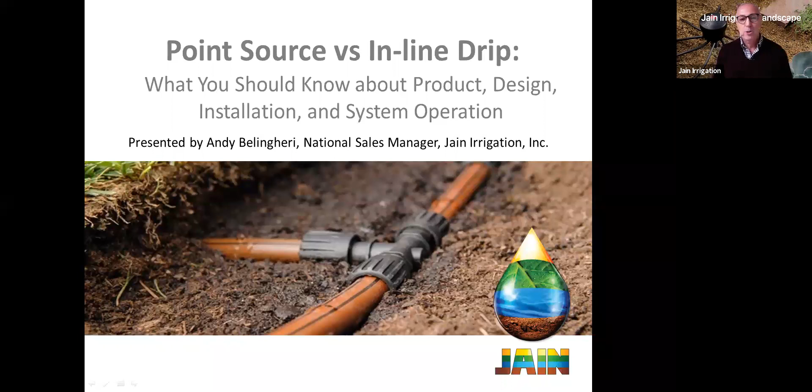A lot of this really, the impetus or the reason we started this was due to COVID-19, and we heard from a lot of customers and end users that we love you guys, but because of the shelter in place, we'd rather not see you for a while. And we wanted to respect that. And we started thinking about ways we can still keep water conservation moving forward, still connect with people, especially because everybody's been sheltered in place for a while now. We started to think these training programs might be good and helpful.

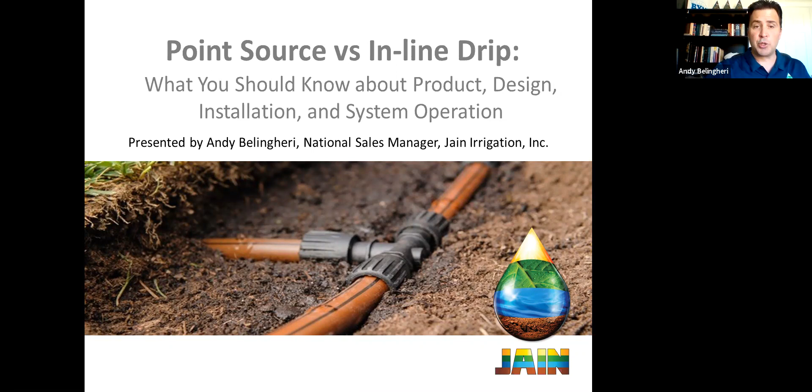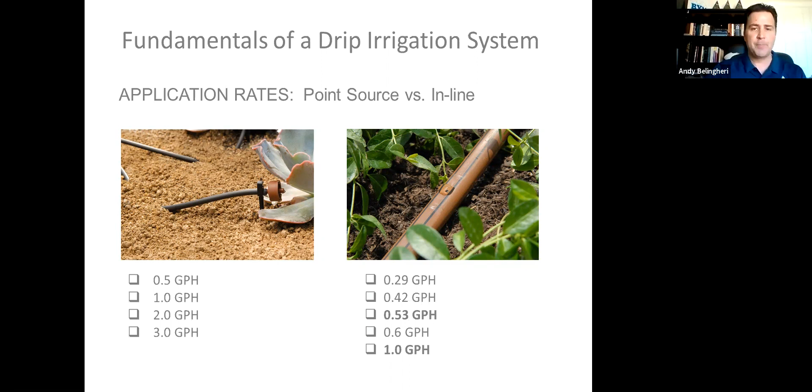In our inline or Emitterline style of irrigation, we see a wider variety of flows, from 0.29 gallons per hour up to 1 gallon per hour. From my experience, not just here in Las Vegas but throughout the Western United States, 0.53 gallons per hour and 1 gallon per hour are the most common. Now, point source and inline irrigation do share some commonalities, and I want to touch on a couple that are non-negotiable, absolutely imperative in our irrigation systems. The first is pressure compensation and pressure regulation. Pressure compensation is nothing more than making sure the flow stays the same regardless of pressure differential.

Pressure regulation, of course, is just what it said. It regulates the pressure, keeps pressure in the operating norm for a drip system to use. Regardless of point source or inline, we want to make sure we are always using pressure compensating emitters and always using a pressure regulating device. So that's one thing that both of these systems will have in common. Every drip system, we want to make sure we employ those two things.

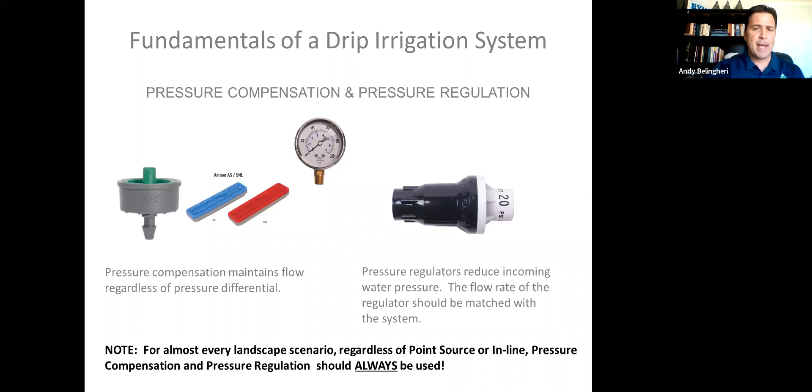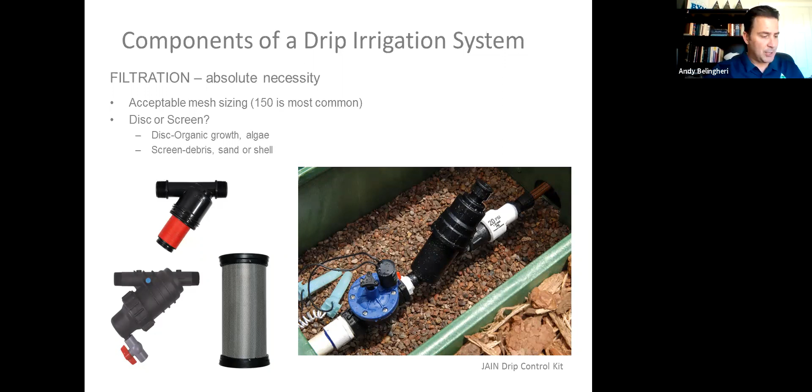One other commonality between the two systems is the necessity to flush, and I'll just touch on this briefly. Whether you're flushing your system manually by either undoing your cap at the end of the line or undoing the figure 8, or if you're employing an automatic flush valve that flushes the system automatically, we want to make sure we are flushing the lines.

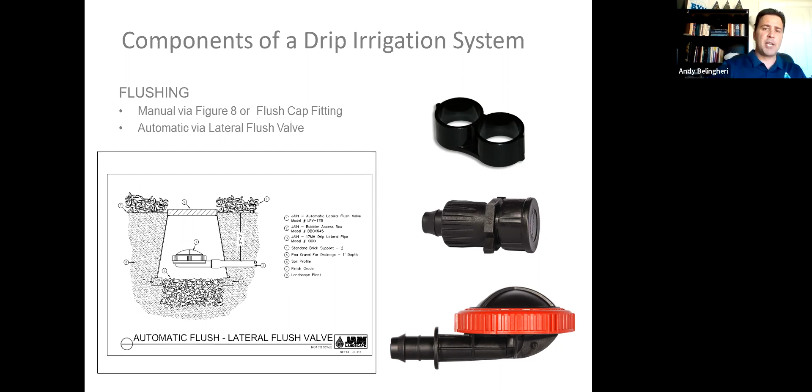What will happen is sometimes, especially in hard water environments, the mineral deposits can build up on the inside and potentially plug the emitters. Or if there was a break in the line and debris got inside there, we can use these devices to keep the system clean. And that just becomes good system maintenance there. So those are three of the commonalities I wanted to touch on between the two systems. Now, let's get into some of the specifics, differences between the two.

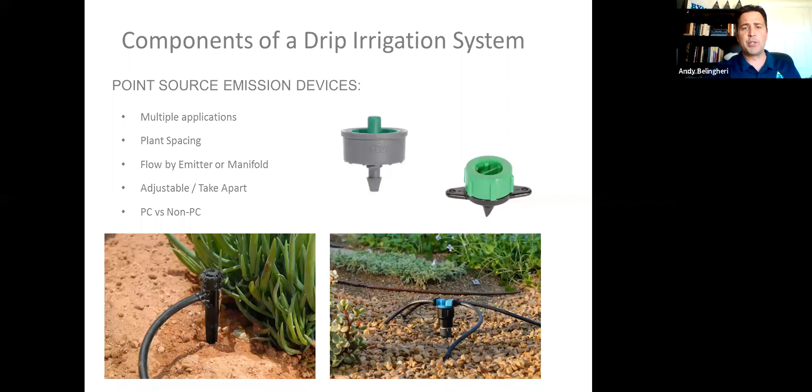The picture in the lower left-hand corner is an adjustable emitter. Again, considered point source and something you'll occasionally see out there. For a commercial landscape, I would not recommend something like that for the sole point that it is not a pressure compensating emitter. And in my experience, those adjustable emitters have a tendency of loosening up. The cap falls off, and the next thing you know, your landscape looks like the Bellagio fountains with shooters squirting up all over throughout the landscape. But as you can see here, these are some examples of point source emitters.

There is a spacing difference in this emitter line. Typical spacing for the 1/4 inch is going to be 6 inches and 12 inches. For the half-inch emitter line, 12 inches, 18, and 24 inches will be most common in the landscape. So those are the basics of the two different systems, right? Point source and emitter line.

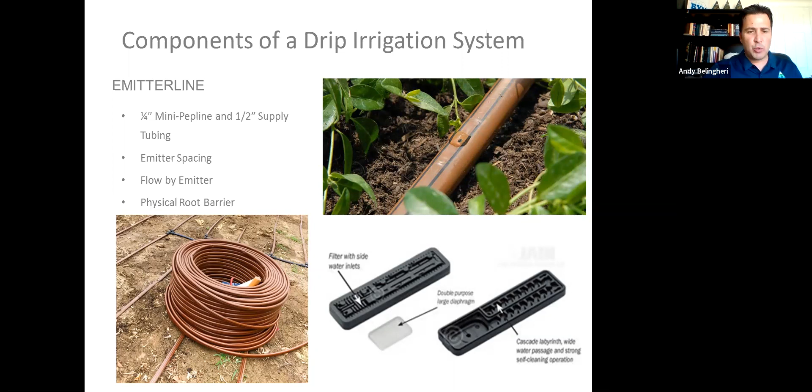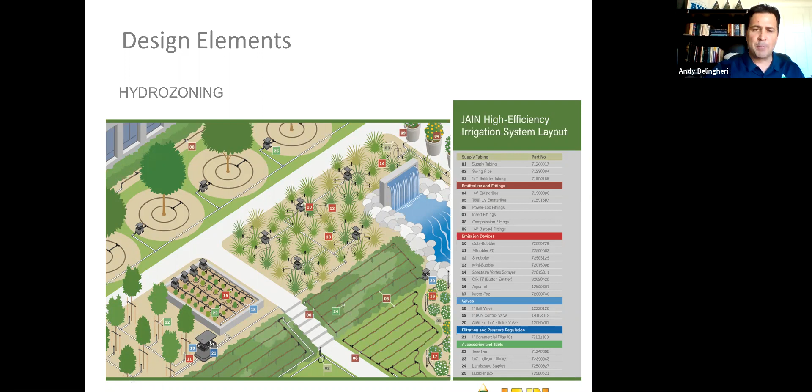Or we look at a slope. A slope's going to have different water requirements, especially in frequency and duration, than everything else would. So that would be in a different zone. So this gets into some of these principles of hydrozoning. Different water requirements between turf and trees, or annual color beds and native plant material. Of course, different types of soil have different water needs. Exposure affects this, as does our slope. That's our first consideration, right? As we're beginning to design and choose between which is correct, point source or emitter line.

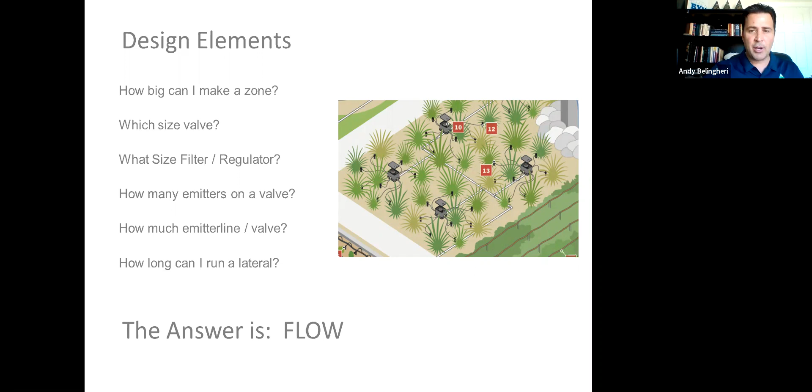There's a few other considerations we want to take into account as well. These are some of the design elements. I get these questions all the time, and these are some of the most common questions. How big can I make a zone? Which size valve do I use? What size filter? What size regulator? How many point source emitters can I put on a valve? How much emitter line can I put on a valve? How long can I run those laterals? And the answer to every single one of these questions is flow. And there are some differences here between point source and emitter line.

The first difference here is in the size of the tubing itself. With point source irrigation, most of the time you're dealing with half-inch tubing. Although I will say, I know some of the good contractors in Las Vegas and the Arizona area are doing more 3/4 inch tubing in their point source applications. But even for the guys that are using half-inch, believe it or not, there are 4 different sizes of half-inch tubing. There's 16 millimeter, 17 millimeter, 18 millimeter, and then we've got this 700, 600. And it's important to know which size you're using, because the hydraulics, the water flow through those tubing will change. And that's going to have an impact on how many emitters you can use in your zone.

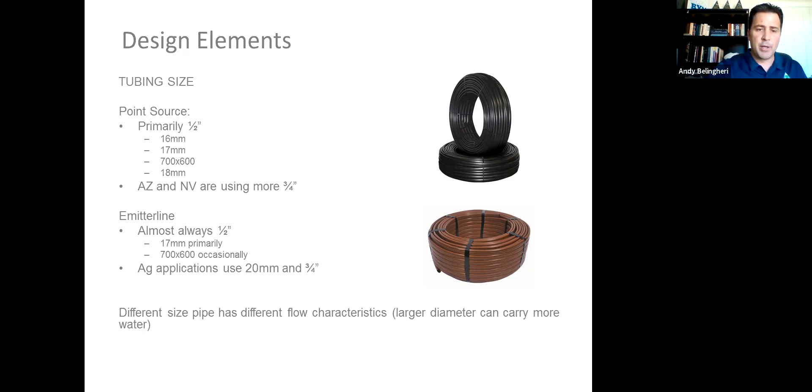Now with the emitter line, it gets a lot easier. 99 times out of 100, it's going to be half-inch in landscape. In fact, I would say 99.9 times, it's always going to be half-inch. And the vast majority of those scenarios are going to be 17 millimeter tubing. If you look at this picture here on the right, that brown roll of tubing, I think anyone who's ever used emitter line before, that roll of tubing they used looks similar to that. It was brown, it was 17 millimeter, and it had emitters built in. And again, it's important to understand the size of the tubing we have, because that gets into our ability to design with these different elements.

So okay, going back to that question a couple slides ago, how many emitters can I have on a zone, or how much emitter line can I have on a zone? Remember, the answer was flow. So with point source, let's start with point source. How many plants do I have? And then how many emitters per plant? And then lastly, what's the flow rate of the emitters? And we use that to calculate the total flow. If I know how many plants, how many emitters per plant, and the flow rate of each emitter, I can calculate my total flow.

The emitter line's a little bit different. With the emitter line, we need to know how many total feet of emitter line we have. And then we want to know the spacing between the emitters. Is it 12 inches? Is it 18 inches? Is it 24 inches? Once we know that, we'll look at the flow rate. And then we know the flow per foot.

And once we know the total feet, we can calculate our total flow. And then it's just as simple as working backwards. I take the total flow of my landscape and divide that by the total flow capability of my valve filter regulator combo. So the typical valve filter regulator combo, depending on the size, whether it's 3/4 inch or 1 inch, that flow could be between 9 to 18 gallons per minute. I could divide that into the total flow of my landscape and come up with the size of my zones.

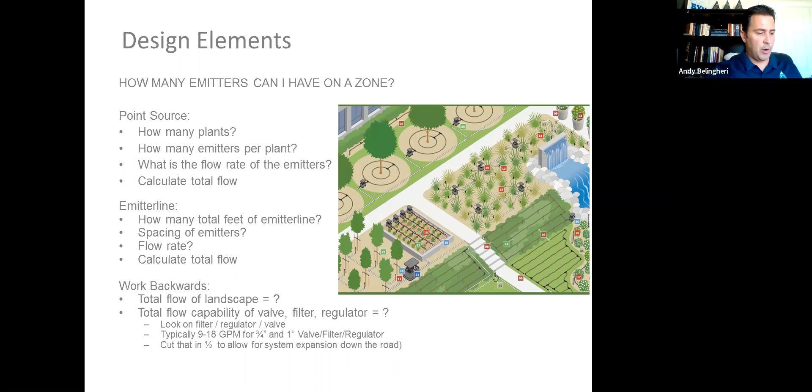The other question that came up then was, how long can I run a single lateral? We'll start with point source. Good rule of thumb, 200 feet. This comes right out of our contractor design guide. 200 feet is a good rule of thumb for a blank lateral. Of course, you could do more, but remember, we want to be conservative in case we need to expand the irrigation system down the road.

Now you ask yourself, how many emitters can I put on a valve? Well, again, we've got to look at the valve size and the flow, and then the flow of the individual emitter. So for example, if I had a 1 inch valve with a flow of 5 gallons per minute, and I had 1 gallon per hour for each emitter, I could have a total of 300 emitters.

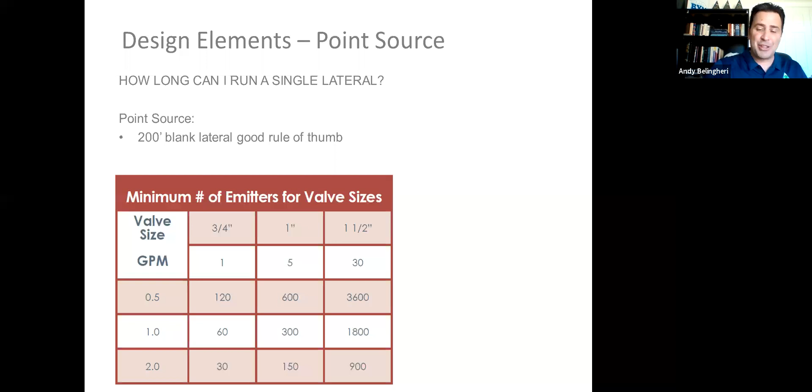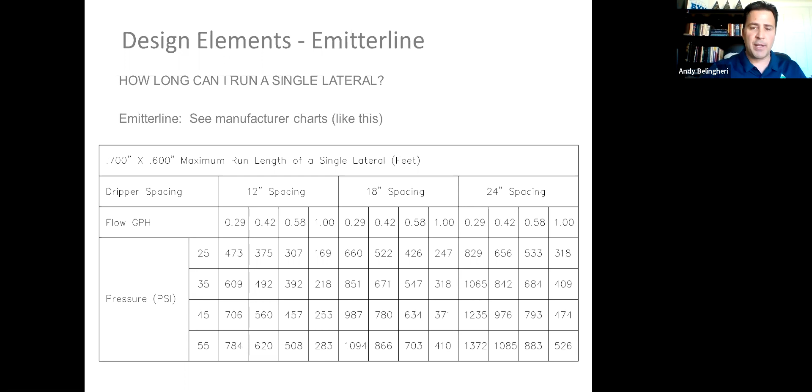For Emitterline, for example, you can see a chart like this. If I have a 12-inch spaced Emitterline and the tubing size is 700 by 600, my flow is 1 gallon per hour, my pressure is 25 psi, I can run a lateral 169 feet. So these resources are available in catalogs and on our website as well. Every manufacturer will publish information like this for their particular product, whether it's Emitterline or blank tubing itself, and then you'll use these charts to aid in your design process.

A couple other things to keep in mind. I know we mentioned length of lateral, but as you're designing, and this is true for both point source and Emitterline, keep in mind the slope or grade changes. You may need to make sure you're using a check valve, for example, if you're on a steep slope. You're always going to want to know your point of connection size and what the flow is there. And then, of course, we already talked about the valve size.

And again, once we figure out the flow of the landscape and we know the flow of the valve, we work backwards, and whatever that number is, cut it in half to allow room for expansion down the road.

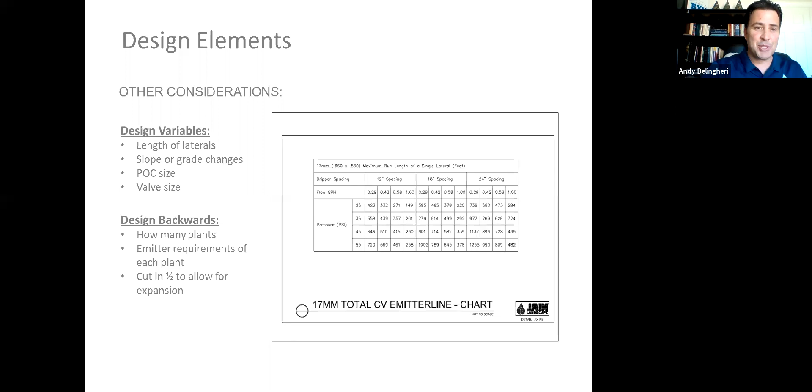When would you use this? Well, this is going to be ideal for spread out landscapes, xeric landscapes, native landscapes. If it's kind of a sporadic plant spacing, a plant here, a plant there, you're going to want to choose point source as your irrigation method.

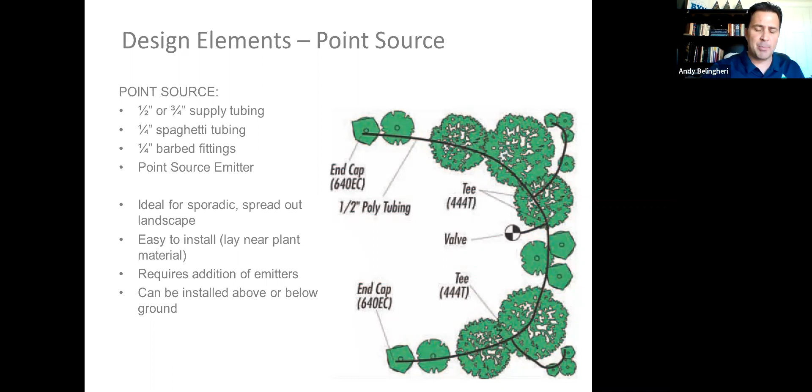And again, this can be installed above ground or below ground. I think from an aesthetic standpoint, at least covering it with mulch is going to be ideal. It just makes for a cleaner install, but it can be installed below ground as well, and it is done so very successfully.

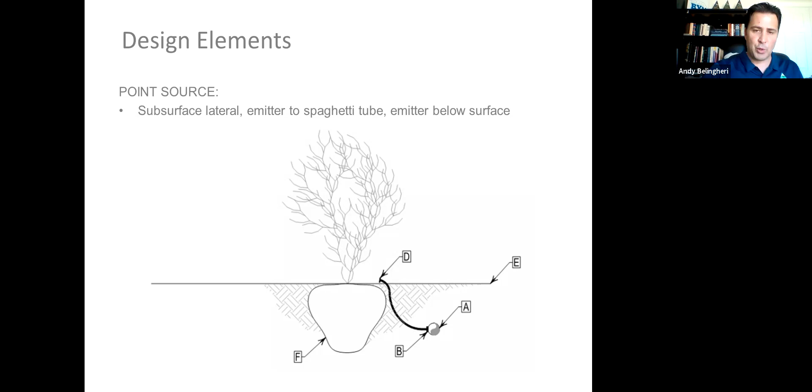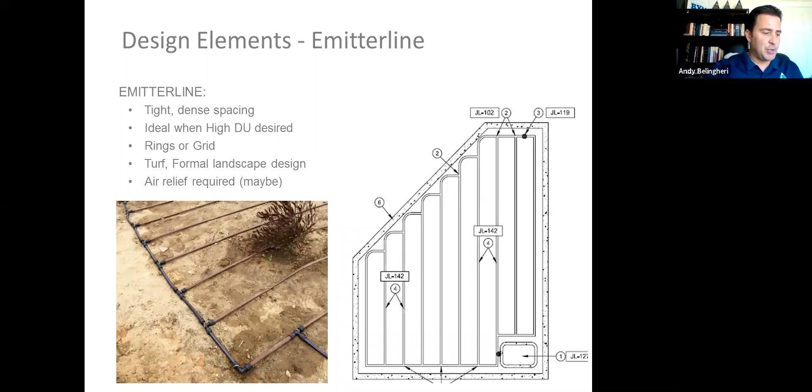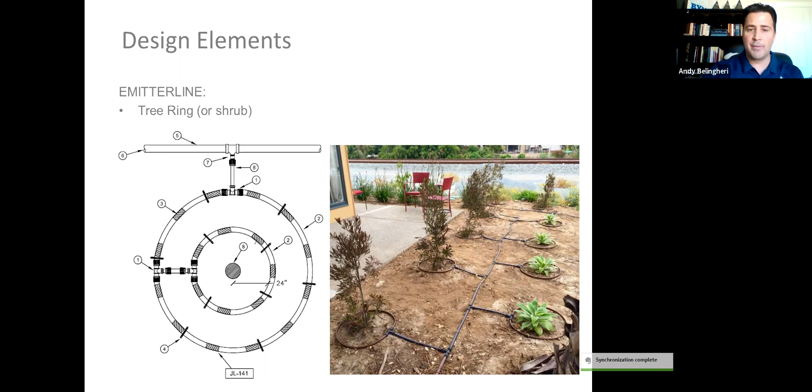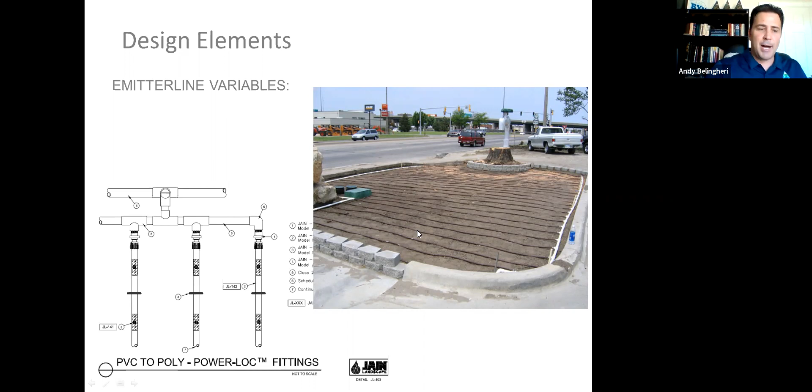Now the question arises then, how do I choose the spacing for Emitterline? Do I go 12-inch spacing on my emitters? Do I go 18-inch spacing on my emitters? Or what about the space between the laterals here? Is that 12 inches? Is it 18 inches? Is it 24 inches? The question then becomes, how far should these emitters be spaced? The answer is, well, it's the soil, right? Depending on the type of soil you have.

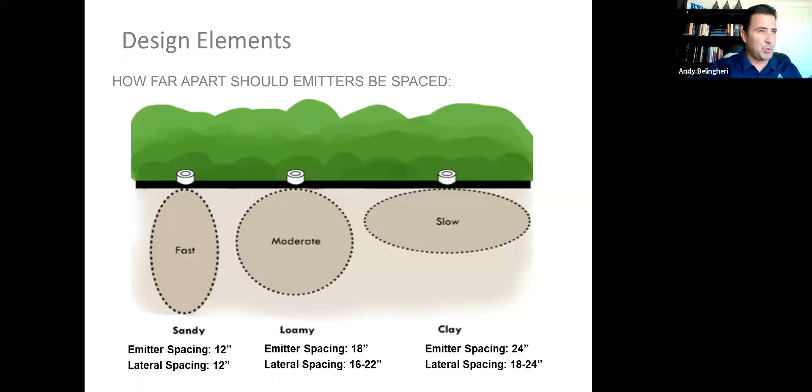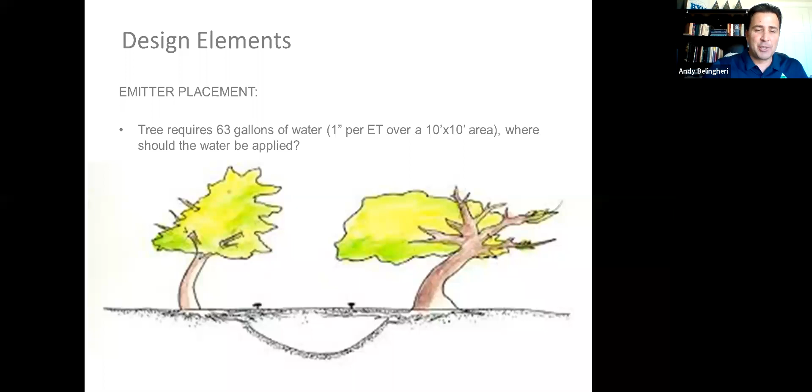As you can see in this slide, the trees aren't happy with that, right? Or shrubs. If the water is in one spot and not spread across the root zone, they struggle. They struggle, especially when it gets hot outside. And so what you want to do then is spread these emission devices across the root zone of the tree.

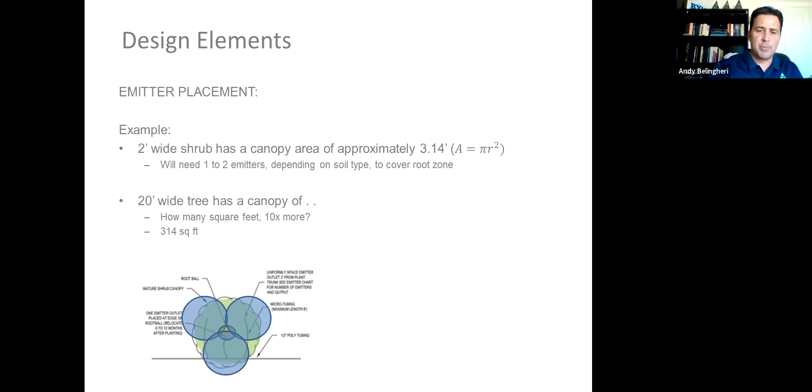And we get into the question then: could I do this with point source, or do I do this with emitter line? How do I choose which one I'm going to do? As you can see in this example, it's just point source. On the next slide, I'll show a couple examples. Let me get the information up on the screen.

If I had a shrub with a 2-foot canopy, going back to high school math, pi r squared gets me an area of about 3 square feet, a root zone that needs to be irrigated. Depending on the soil type, 1 to 2 emitters would take care of that. You can see that illustrated in this picture, the tree and the wetting pattern of the emitters that cover the root zone.

But if I increase that canopy from 2 to 20, I greatly increase the number of emitters I need. Our square footage goes from 3 square feet to 300 square feet, which means we have 100 times more area, so we need 100 times more emitters. Now, if you've ever installed irrigation, you know that putting out 3 point source emitters is not a problem. If you had to put 100 around a tree, that becomes problematic.

So in the question of do I use point source or emitter line, sometimes the answer comes down to how many emitters I need to put out there. If I'm putting out a couple, point source makes sense. If I have to put out many, I would use emitter line. This is a kind of goofy drawing, but you get the representation of how that would work, a tree ring.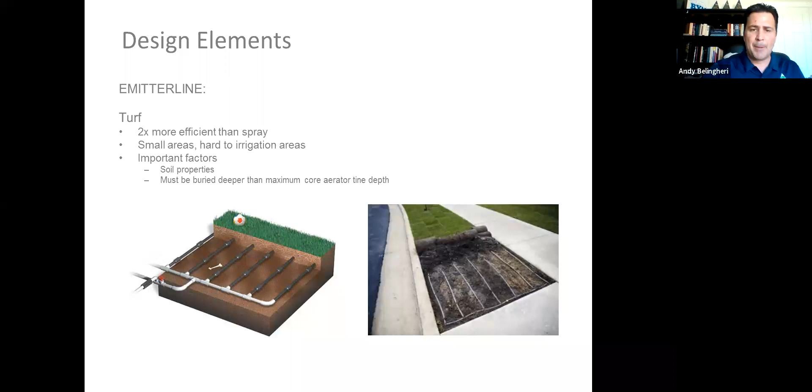Again, we talked earlier about using emitter line in high density planted areas, tightly planted areas. You can see here these would be either color beds or shrub beds that you wanted to irrigate every square foot and jam a lot of plants into. That's when emitter line starts to make sense.

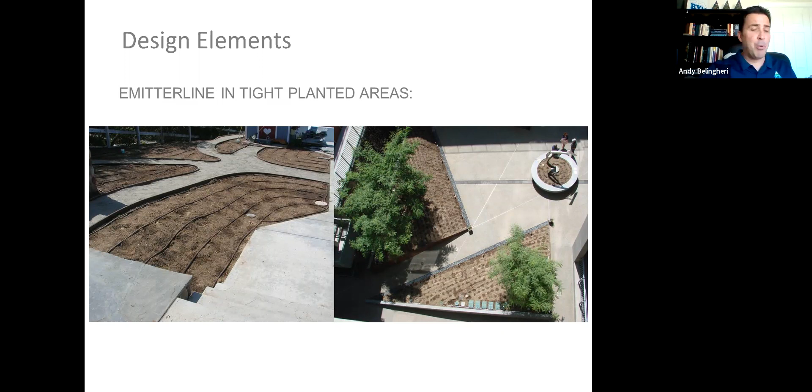Emitter line for tree rings or high density planted areas. Anywhere a high distribution uniformity is required, I'm going with emitter line.

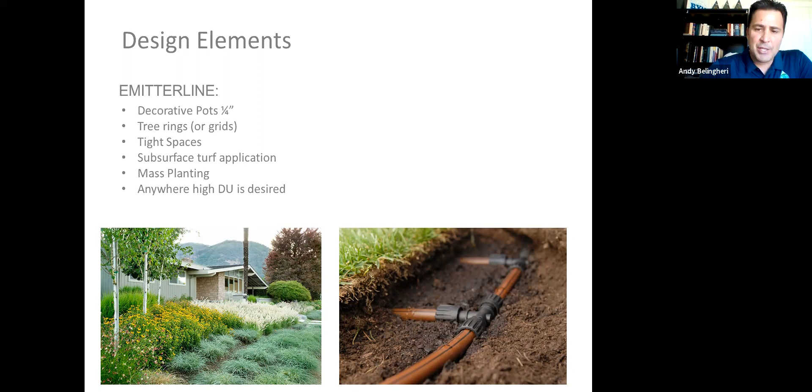And I will say one last thing here. I've prepared a checklist for you all at the end that we'll leave up as you ask questions. But I will say one thing about the technology used in your drip irrigation product: stick with stuff that is of high quality. There's an old saying, you buy once, you cry once. Stick with high quality tubing that will last 10 to 20 years. Stick with fittings that don't blow apart. And with emitter line specifically, stick with something that has a physical root barrier.

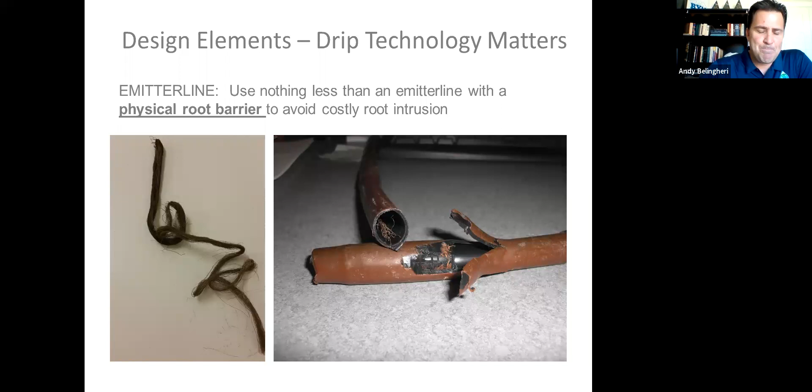Don't be fooled by low cost and low quality.

To summarize, as we go through our decision-making hierarchy on whether we choose point source or inline irrigation, make sure we cover the basics. We need pressure compensating emitters, pressure regulation is absolutely mandatory, and you've got to have a filter. You cannot do drip irrigation without a filter. We need to know the flow rate of the emission device itself and the total system flow.

Remember, let's design to half, giving ourselves room to expand the irrigation system down the road. You may need a check valve if you're on a slope, and we want to make sure we're flushing the drip irrigation system to keep it in tip-top shape. I recommend an automatic lateral flush valve.

Ultimately, as we're deciding between point source and emitter line, if your landscape plant spacing is sporadic, it's a loose design, it's native, or there's small or isolated plant material, you can go with point source. If your landscape has tight density, tree rings are needed, you're irrigating turf, it's a very formal design, an annual color bed, or anywhere high distribution uniformity is desired, go with emitter line.

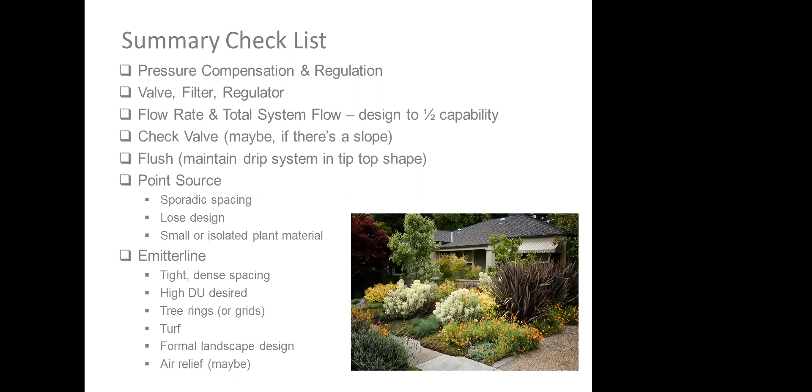That's the end of the presentation. I'll leave the summary checklist up here in case anybody wants to take notes. I'd be more than happy to share this presentation with anybody as well. But I'd love to open this up to questions.

Richard, I think I saw a couple questions pop up. Did you have those? Yeah, thanks, Andy. A couple questions to start out with. Number one, great job, I wanted to say that definitely.

I want to ask you about the flush valves. I see it on the summary checklist, and you mentioned the flush valves early on. When you're actually out in the field and you see jobs, would you say you see a lot of flush valves on jobs? Not as many as I'd like to see.

It's tough. I spent close to 20 years as a landscape contractor. I understand the pressures of maintaining a commercial landscape. It's all about how green the grass is, how beautiful the flowers are, and whether there's weeds or trash. Too often the things that are out of sight become out of mind. Unfortunately, a lot of contractors aren't taking the time to flush the drip zone, and that causes problems for them down the road. You should be flushing your drip zones, depending on the quality of the water, quarterly, maybe monthly, but that ends up not happening because guys are too concentrated on picking up trash, pulling weeds, mowing the grass.

If you went to an automatic lateral flush valve or any type of automatic flush valve, you're saving labor. The system flushes itself, and there's no need to go through and manually do it. A few dollars on product saves you hundreds of dollars in labor down the road, not to mention the potential failure that could happen from plugged systems. So I'd like to see more contractors using flush valves. I think that would make a big difference in the overall quality of their drip systems and the manpower used to maintain the landscapes.

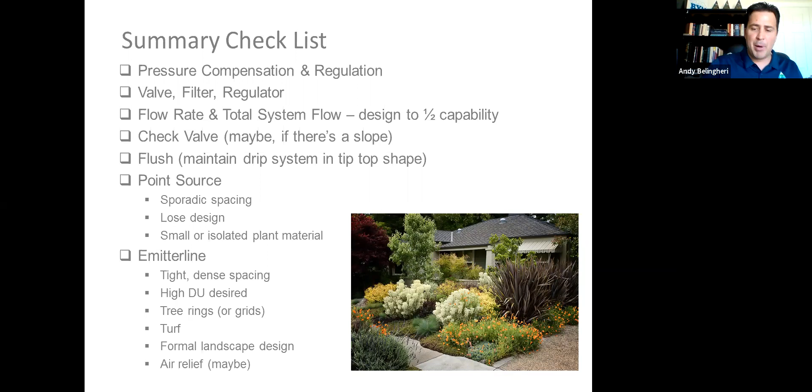Flush valves are not hard to build into an existing system. Every drip system is typically going to terminate somewhere. I've seen guys bend the tubing over, wrap it up with irrigation wire, and that's how they end it. You could cut that off and put a flush valve in right at the end, putting it in a little box like this. Let me go back here, if you guys don't mind. This is a great design Michael Derwenko with J Irrigation did for us. You can see here, doing that at the end of the line is very simple. It's very easy to do.

Some of these other components—you can add an emitter line underneath an existing tree that's been irrigated by spray retroactively in a turf conversion. You can do it keeping the turf in place. We've seen our guys in Kern, California do that. So it is possible to come back and retrofit any irrigation system, either converting spray to drip or upgrading existing drip. It's definitely doable.

Yeah, okay, great, thanks Andy. So now we have a question about putting subsurface drip in lawns or in turf, and how deep should these lines be, and how would something like this work with Bermuda grass specifically?

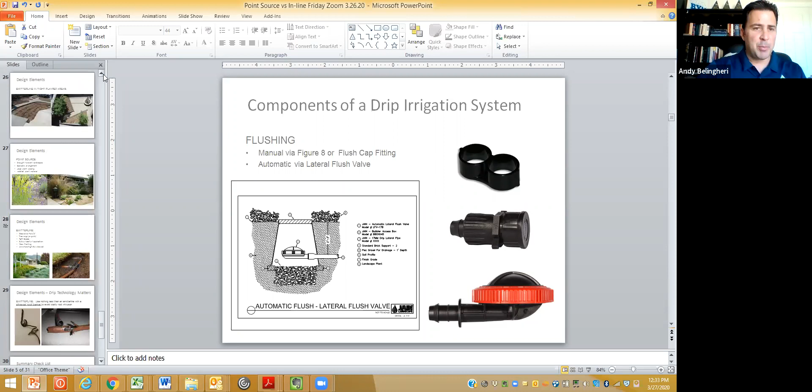It should work just fine with Bermuda. Let me go back to this slide here. You bring up a good point about how deep the line should be. If we're doing our jobs as contractors, we're aerating turf, right? So we've got to make sure these lines are buried deeper than the tines of the aerators we're using. 6 to 8 inches seems to be the norm, that seems about right. But you've got to take into account your soil, the physical properties of your soil as well.

For subsurface drip in turf, the biggest issue isn't so much how deep it is or whether it's getting hit by core aerators. It's whether you understand the physical properties of your soil, and whether those physical properties are consistent. If I have sand on one part of my grass and clay on the other, it's hard to manage, I'm either overwatering and flooding one area or underwatering the other. So having a consistent soil texture is key, and then understanding that texture so I can get the spacing on emitters and laterals built into the system. When that's done well, it is done very well. A friend of mine did it in his backyard and his grass looks beautiful, it's been going on 2 or 3 years. So when it's done right, it can be very, very effective, and use half the amount of water you'd typically use with spray.

All right, great, thank you. Another question about flush valves: what are the pros and cons of using a manual flush valve versus an auto flush valve? How do you feel about those two?

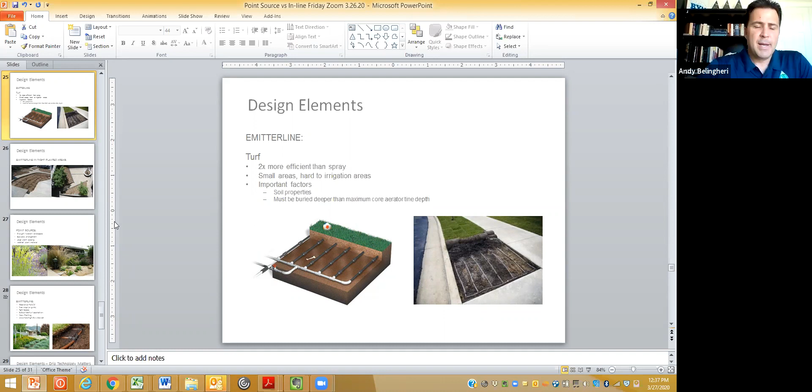Yeah, it really is. I'm glad you brought up color beds, let me go to this slide here for example. Spray on color beds, I've never thought was a good idea, especially in these hot summer climates. The water droplets sit on the flower, the sun comes out, and the flowers always take a bit of a beating. I've personally witnessed, if you're using emitter line on a color bed, that water's applied at the soil surface, and the plants look so much more healthy and robust, they don't take the beating of the water droplets. Especially in a color bed where you're ripping out that color and changing it 1, 2, 3, 4 times a year, it's a great time in between a color rotation to convert from spray to drip. And some of the other shrub beds and turf beds, it's equally as easy.

It's just a matter of understanding where the root zones are. So if I had a hedge of ligustrum, for example, I would want to understand how big the root zone is. I want to understand my soil properties, and then I'd run 2, 4, maybe 5 lines, make sure I'm covering the root zone, and I just run that right along the hedge, cover with mulch, and it would be a simple conversion, as easy as getting the lines installed in the field.

You could tee off an existing PVC lateral, and then go over to the valve zone and make sure it is being converted to drip. And that would require a filter and a pressure regulator.